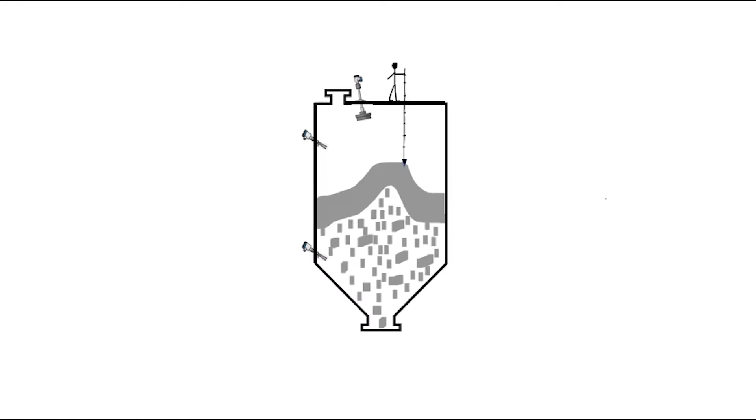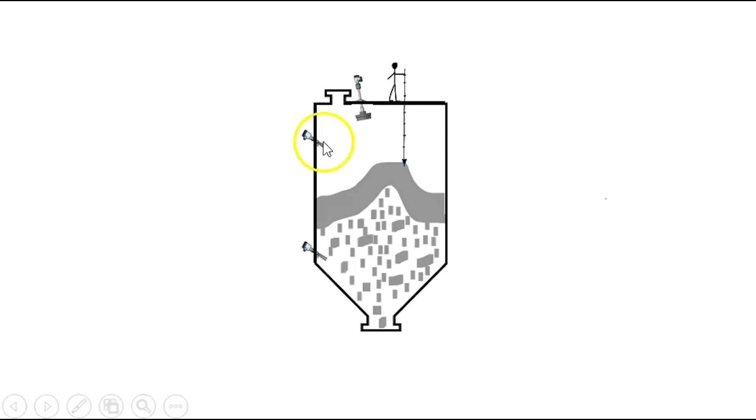Forgive my crude artwork here. When we look at some of the instrumentation we've used for solids and powders in the past, I have to tell you there's nothing wrong with any of these types of methods, nothing at all. It just seems that in today's market, radar gains more and more popularity because it's simple and easy to use. These would be level switches that stick in the side of the tank and tell us if they see level or not, on or off. So you can see this one would be triggering level. This one hasn't seen anything yet.

Ultrasonic level measurements use sound waves, acoustic waves, non-contact to sense the level. And then we have mechanical methods such as plumb bobs or ropes, where a person physically gets on top of the tank and drops a rope through the top of the tank to check the level.

When you look at the drawing, you have to consider that solid applications are often jagged and rough. There usually are no smooth surfaces in a solids level application. You've got angles of repose, you've got rat holes, you've got material filling, emptying. It's a difficult application. And on top of that, solid applications often have very low dielectric constants. They might have dust in the atmosphere. They're not easy applications to measure.

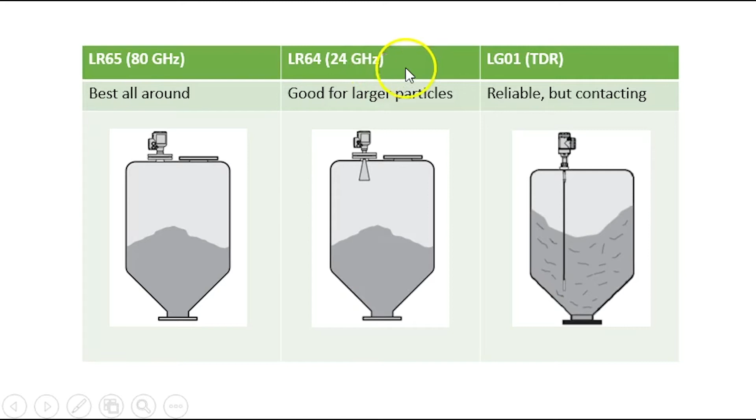When you look at radar, though, radars are growing in popularity for solids level applications. This is our lineup. This is the LR65, which is an 80 gigahertz frequency. The LR64 is a 24 gigahertz frequency. And the LG01 is a guided wave radar. Our presentation today will talk about these two. And again, remember, there is no perfect radar for every application.

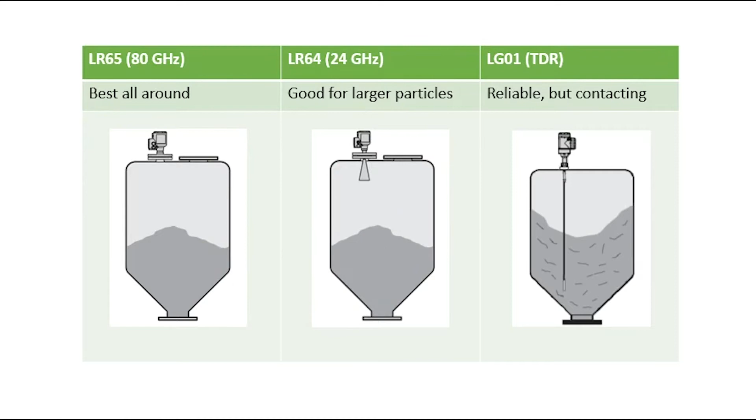The LR65 is overall the most universal of the two radars. Why is that? It has an 80 gigahertz frequency, and that 80 gigahertz frequency has a small wavelength that can measure any size medium. The smaller wavelength is conducive to small particles like fine powders, but it can handle the bigger stuff too. It provides an increased focus. This narrow beam gives an increased focus, which leads to better dynamic range, better reflection off the material, a good ability to work with dust, and because of that narrow beam, you could even place it in a high nozzle.

The LR64 is a 24 gigahertz radar, and a 3-inch drop antenna, which is this kind of circular antenna here, produces a 9-degree beam versus a 1 1/2-inch lens antenna which has a 4-degree beam on the LR65. So you get a little bit wider beam, and at 24 gigahertz we've got a larger wavelength. The LR64 is more applicable to particle dimensions that are bigger, like rocks and granulates.

If you use the 24 gigahertz, you can pick between a drop antenna and a horn antenna. The drop is the perfect choice for bulk solid applications in dirty environments. Why is that? It's because adherences of bulk solid material like condensed water are largely avoided by the smooth surface of the antenna. Also, adherences are generally less critical with the volumetric plastic body of the antenna.

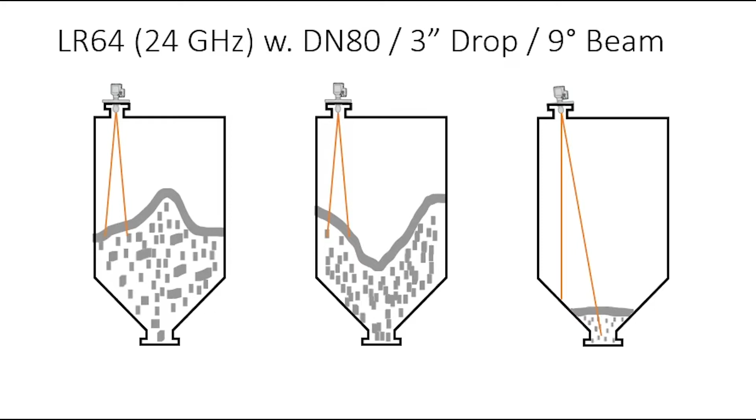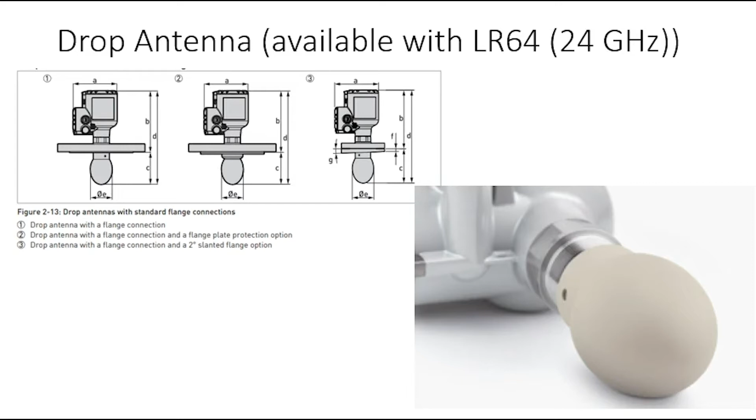Taking a closer look at the drop antenna for the 24 gigahertz, no purging is required for this. Actually, purging is not available, and that can save some time and money when it comes to putting in a purging system. But because of that round antenna that generally resists buildup, you're not going to need any type of purging. Now, by contrast, this is the only antenna available on the LR65, the 80 gigahertz antenna.

It's called a lens antenna. There's no protrusion into the tank. It's made of PEEK material, and as you can kind of see in the drawings here, it doesn't protrude out hardly at all.

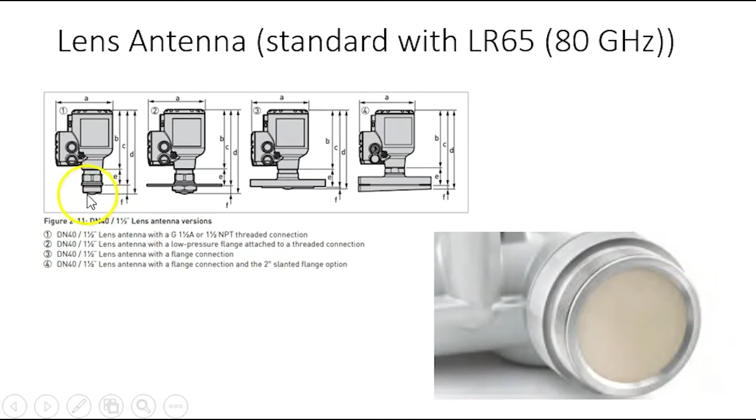So now that you've had a chance to look at both radars, you might wonder which one you like best or which one we would recommend.

80 gigahertz is the more universal. As I said before, it can handle the small stuff and the big stuff. But the main reason it's more reliable is it has a smaller beam size, and that smaller beam gives a better reflection off of those challenging solid surfaces. You've got rough edges, you've got rat holes, you've got angles of repose, you've got low dielectric constant materials. You're going to get a much more reliable signal, more signal down, more signal back from an 80 gigahertz radar.

If you need evidence as to what's going on in other industries, take a look at the auto industry. Automotive radar are moving from 24 gigahertz to 77 and 80 gigahertz on new cars. And it's the evolution of technology. They're more accurate, they have higher resolution, and just like we've seen other advances in the auto industry, fuel injection,

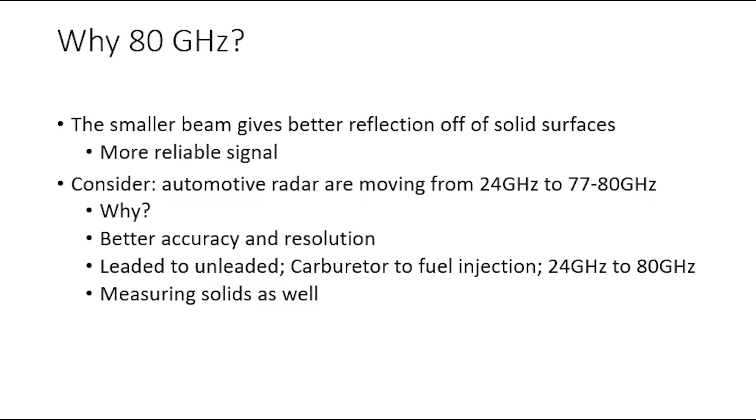unleaded gasoline, the radars are becoming the same. And think of what the radar in your car is measuring. We talk about liquids as an application. It's not like you've got a pool of water in front of your car that the radar is trying to get a reflection off of. It's actually measuring solids. You've got a plastic bumper or a metal bumper off of a car in front of you. So those are challenging applications as well. And an 80 gigahertz radar in a car, which is often behind the front emblem on your front grille, they really do a fantastic job helping us drive.

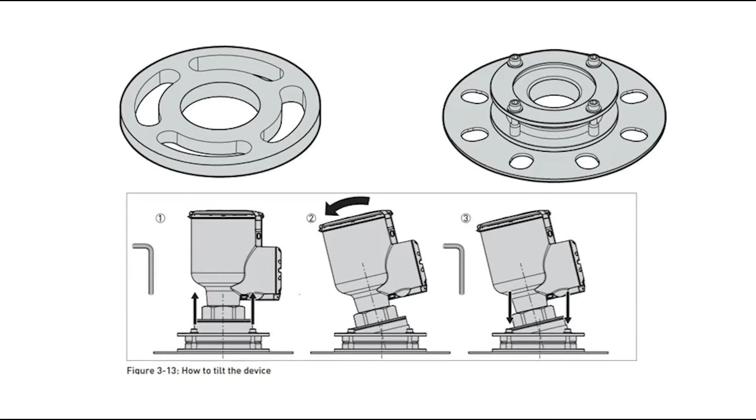So we've talked about the challenges that solids level radars face. What are we going to need to do to ensure we're giving the radar the best chance at success? These are some of the accessories you may want to purchase or use with your solid radar. We want to make sure we're going to install the radar properly. Let me explain briefly why you may need these accessories, and then I'll show you where you can find them.

But first, I have to go back to our LR65 example. In a solids level application, a rule of thumb is that whatever the radar beam sees is averaged out by the radar processing algorithms and software. We know there are almost no even surfaces in solids level measurement. If your client would like to average somewhere outside the normal beam angle, you can do that for them.

The photos on the left and middle illustrate a radar that's flat. It's sitting nicely on top of a nozzle here. And this one is angled, as you can see.

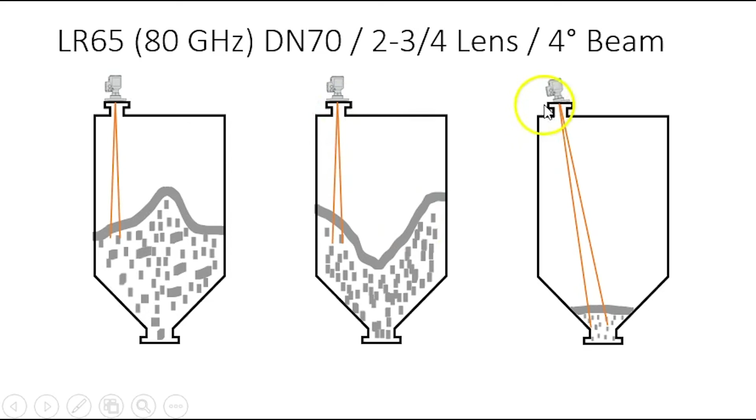So why would you leave the radar flat, or why would you aim it? You have to think about where you want the beam to hit. If we install our radar on the top here and it shoots straight down, let's assume this red dot is where the beam intersects from an 80 gigahertz and the yellow is from a 24 gigahertz. That may be fine for you and your client. If they want to know the level or the distance right there, certainly we can do that. If they want to know it more here in the middle at this angle of repose, you would have to aim the radar there. And if you look at the difference between the red circle and the yellow oval, this is the difference between 24 and 80 gigahertz.

Assume the yellow, the bigger wave, is the 24 gigahertz. This is the advantage the 24 gigahertz had. We talked about how the radar averages what it sees in the solids level application. It's taking samples from all the points it sees in the wave. This is the advantage a 24 gigahertz has, because it's got a little bit wider angle. It's going to actually see more of that solids level and be able to give a better average of what it sees. The drawback is you might not get as much reflectivity, you might not have as reliable of a signal, but you do get a nice average.

Just keep in mind, are we going to try and intersect the level here, or are we going to try and do it here? It all depends on what you and your client need.

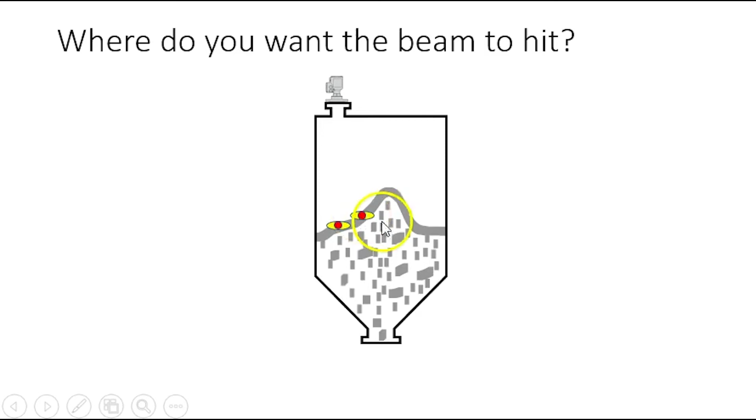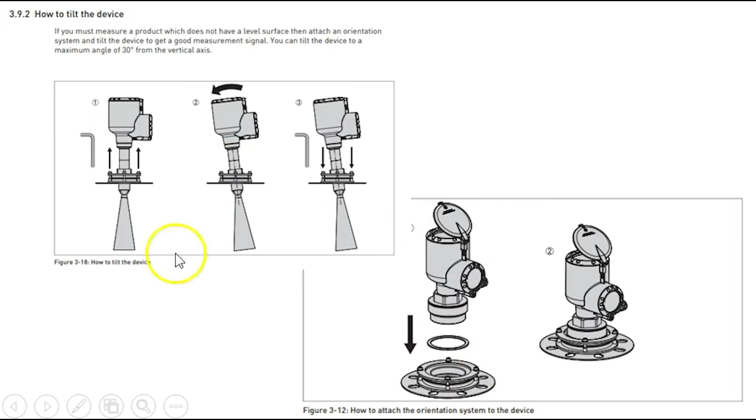If you decide you want to tilt the radar so you can aim the beam, here are a couple of accessories you might want to look at. This one's called the orientation system. It can angle the radar up to 30 degrees. Here's another look at the orientation system. And then this is a 2-degree flange, just to give it a little bit of a tilt.

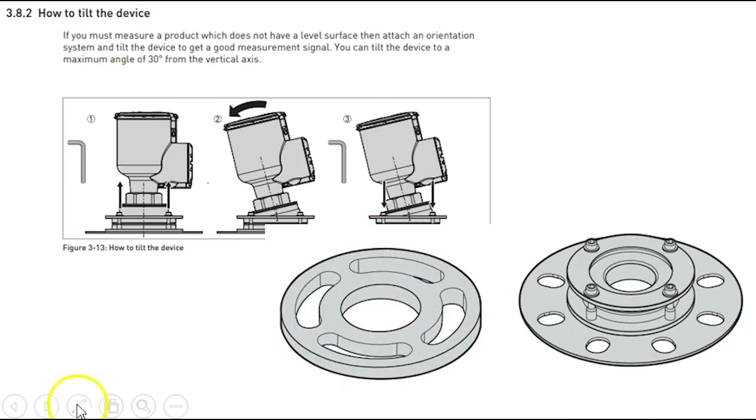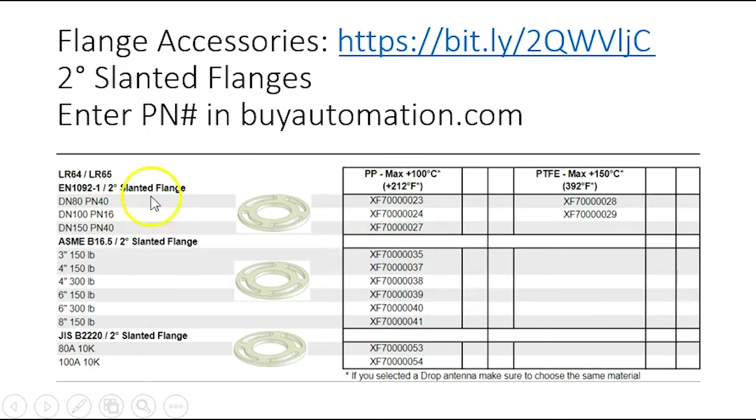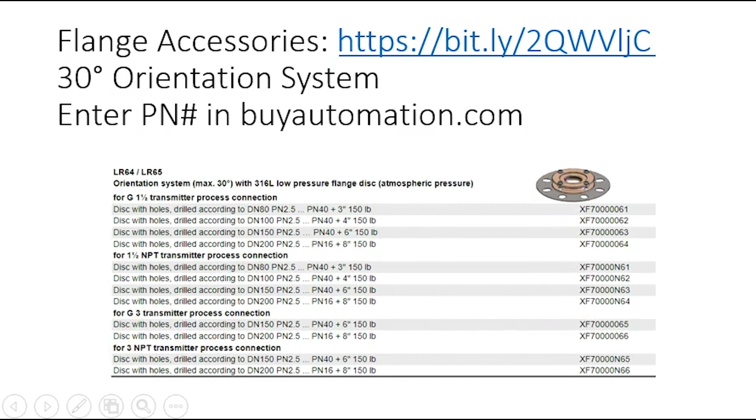When it comes to aiming, remember, you don't have to aim it. It depends on where you want to see that beam intersect the level. And if you want to do something outside of that, you can actually install 2 radars if you want to try and get a profile of your solids or powder level application.

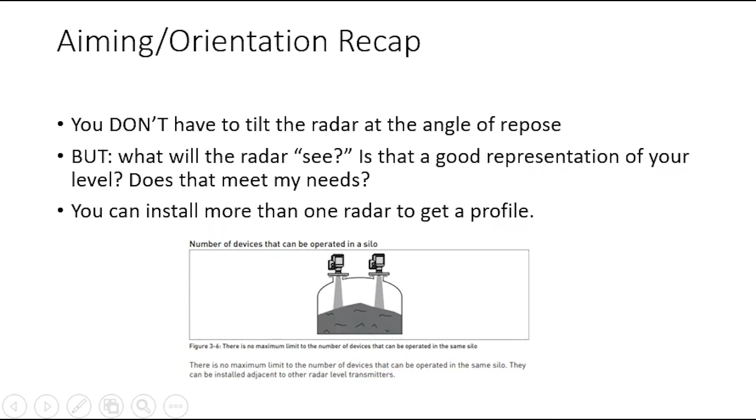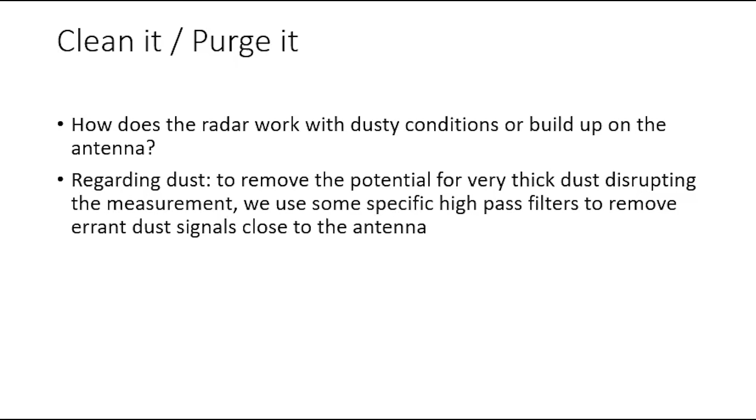We hear so much about dust, and yes, the radars can work with dust. You might probably have dust in a solids application. To remove the potential for very thick dust that can disrupt the measurement, we use high-pass filters to remove errant dust signals close to the antenna.

If you've got experience with radar, maybe you've seen this before - this is an air purge option. I'll read verbatim from the instructions what we say about using a purge to keep things clean. If it is necessary to clean the lens antenna, you can attach a purging system adapter to the device. This part is available as an accessory for devices with threaded connections.

Here's the purging system right there. You hook up your air here. Here it is for the LR64.

If it is possible that there will be buildup or condensation, purging options are available for metallic horn antennas. Purge the antenna at intervals to make sure that the inner surface stays clean and the device measures accurately. Remember, we talked about the drop antenna - there is no purge available for the drop.

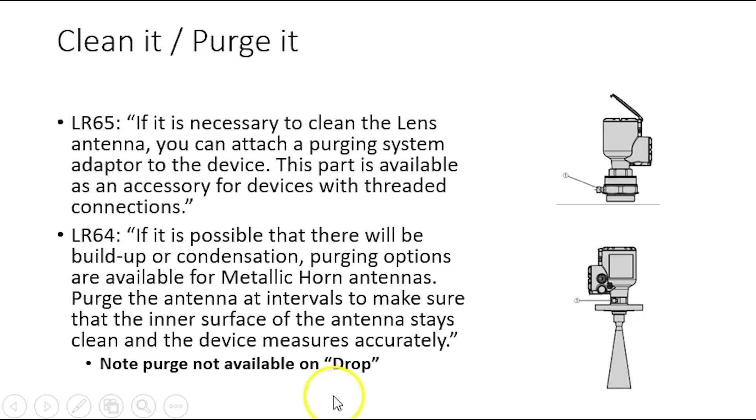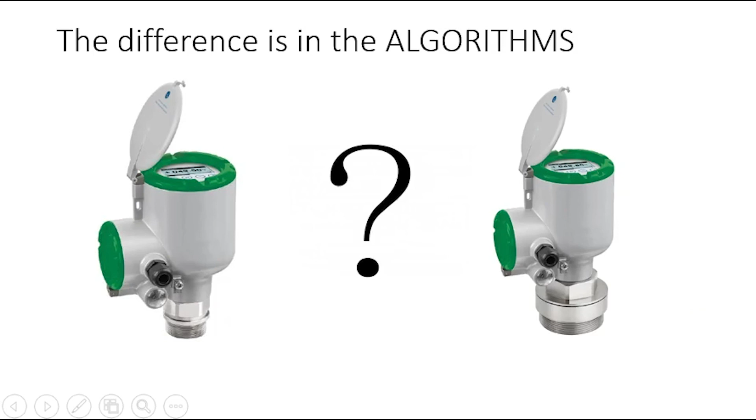Before I depart, I want to go back to the algorithms. If you've watched this video, maybe you're thinking, okay, what's the difference between a liquids radar and a solids radar? For example, how are the 80 gigahertz LR75, which is a model for liquids, and the 80 gigahertz LR65 different? They're both 80 gigahertz, they both measure level, and besides some differences in available antenna sizes, they're very similar, except for how they process signals and their algorithms. Each radar has specific algorithms that make it specific to use in liquids or solids.

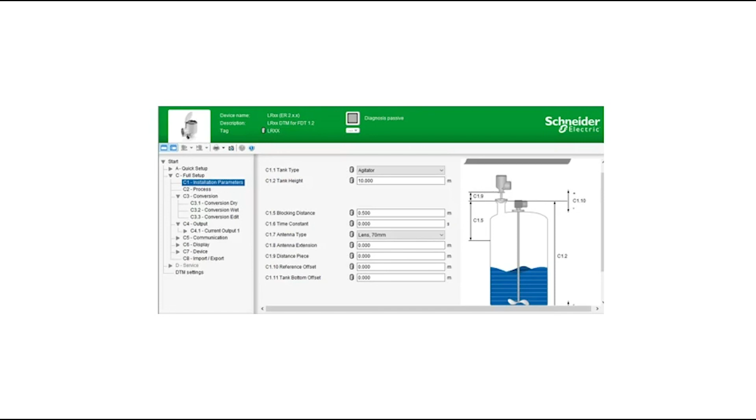When we're working with liquids, usually only a single measurement is enough to get a good, reliable measurement. Liquids have a highly reflective surface. That's not the case for solids because the reflections are weaker and can be mixed up with erratic signals. What we do is overlap several measurements to determine which signal is the true level. Remember, we talked about that averaging of what the beam sees.

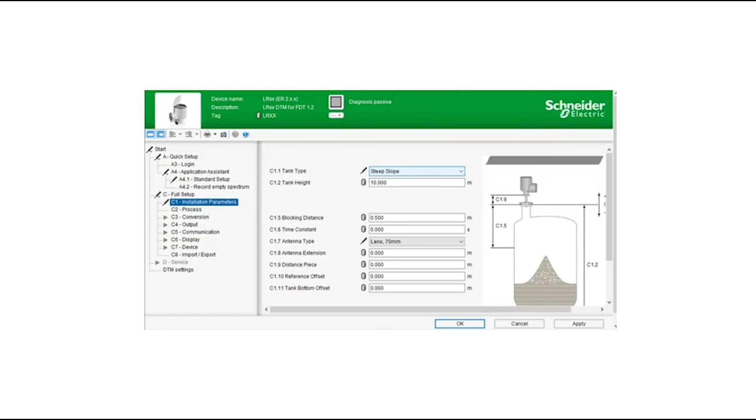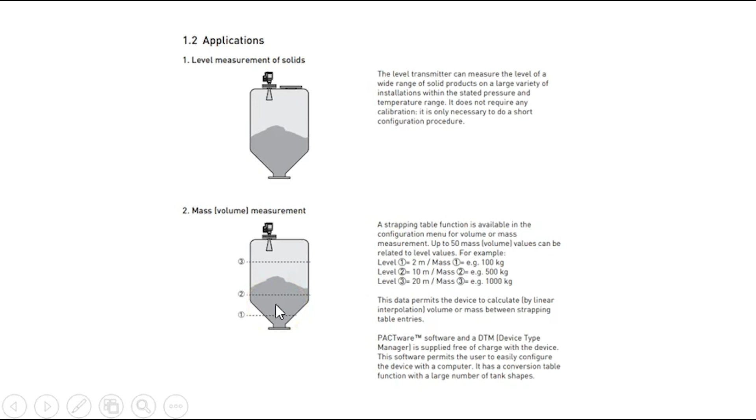Finally, I'd be remiss if I didn't mention how solids are normally measured. It may be level or distance, but it's often volume or mass. You can build a strapping table with a minimum of 2 entries in the display, or by using PACTware, to calculate volume or mass inside your vessel.